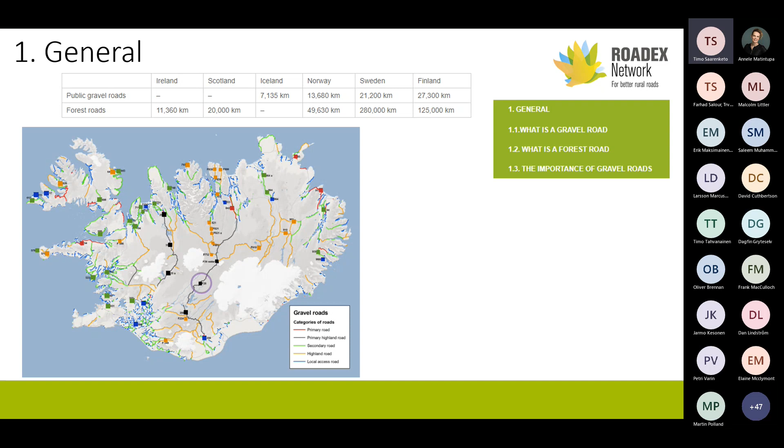One interesting feature in this chapter, even if you're not so interested in gravel roads, is an interactive system of photos of different types of gravel roads in Iceland. You'll see a map, and if you click on it - for example this F26 - you'll see a photo. In my opinion it's amazing; you can make an amazing tour all around Iceland and see gravel roads. It's fantastic - thanks to Hafdis, she did great work collecting this.

Chapter 2 tells about gravel and forest road components in general, about typical cross sections. There were some variations between countries, so this is my understanding of an average cross section between each country - not one individual type, but a typical compromise of different systems. For instance, gravel roads in general are 5.75 to 6.25 meters.

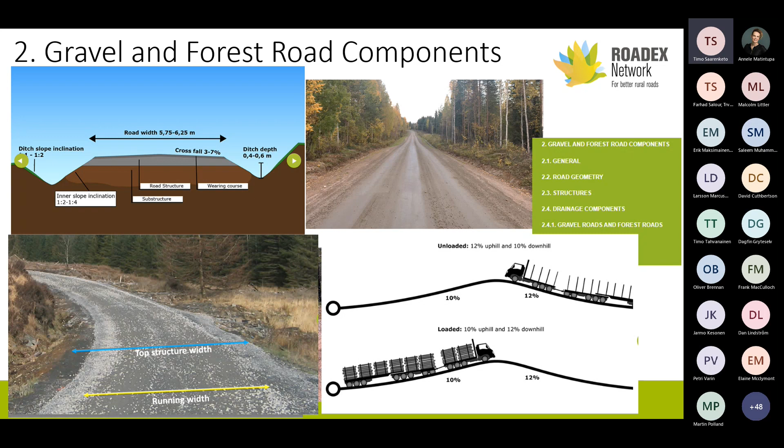So you are collecting timber and then driving back, so the vertical geometry can be different depending on direction. When you are hauling timber loaded, the vertical geometry is 10%, and unloaded it's 12%. I think it's quite a nice idea for saving money, especially in hill country areas. There are a lot of other issues too, but I took this as another example for this presentation, about bridges.

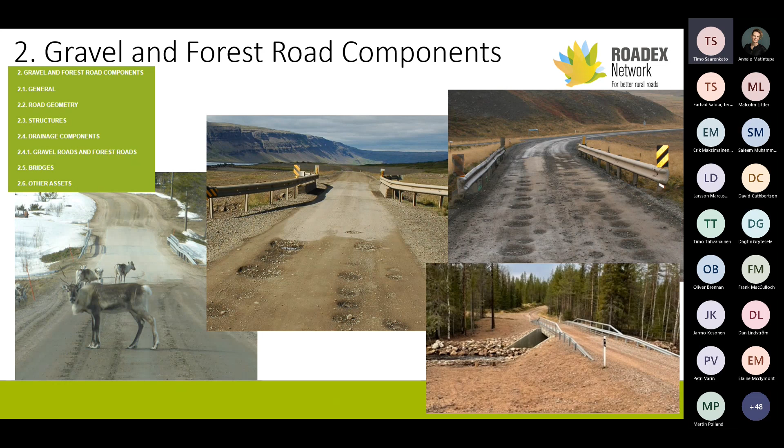One idea, not used in every country but very useful where it has been used, especially on gravel roads: if you have bridges, you put pavement on both sides of the bridge. There are one or two reasons for that. One is that with a paved road section you avoid potholes, because bridge joints and unevenness cause a lot of potholes. The other reason is that when you use dust binders like chlorides, they go with the sand onto the bridges, especially concrete bridges, and can cause extra corrosion on the bridge decks. So paving protects against that too. I'd say this could be considered one of the best practice issues on bridges.

A lot of the text is about the wearing course. That's one of my favorite issues, because I've been doing research on gravel road wearing course since 1981 - almost 50 years, actually more than 40 years ago.

One issue we're explaining here is a very nice history of how wearing course grading came about. I've heard this from an old engineer when I started my road career, and I don't know if it's an urban story - I haven't seen any report - but it was thought to be true that the history comes from Sweden. In the 20s and 30s in Sweden, there was research on gravel road wearing course material. First they checked the material on roads where they had a dusting problem and where they didn't.

In this case, the green area was where the red arrow showed where they didn't have dusting problems. Then they studied wearing courses where they didn't have deformation or wetting problems, plastic deformation problems, and that was the blue area. The area between these gradings was selected as the optimum grain size distribution of the wearing course. I don't absolutely know if it's the true story, but it's a nice story and easy to believe that it happened.

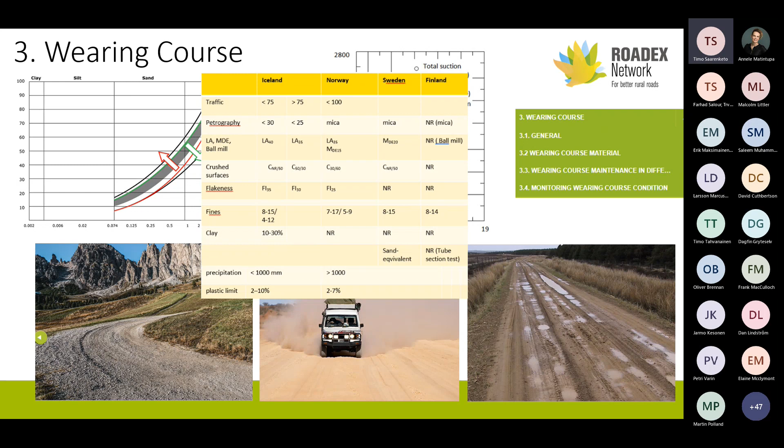Also some ideas about aggregate quality, some comparisons from Icelandic work. Iceland did a comparison of aggregate quality and how it should be studied for wearing course aggregate material. There are quite big changes, but very interesting comparisons too.

Another issue we found more than 20 years ago with road scanners, in the late 90s when road scanners started, we did research on gravel roads. One of the first things we found is that the wearing course thickness is not even, unlike asphalt roads—that assumption is totally wrong. The thickness changes a lot both in transverse and longitudinal directions, because of grading and other factors.

On top you can see a gravel road cross section from Siekkasjärvi, Sweden, northern Sweden, where on the wheel path you have about 60 centimeters of wearing course, but in between, on the field bed, you have hardly anything. This means that when you have mode 2 rutting, graders making it even are just increasing the problem.

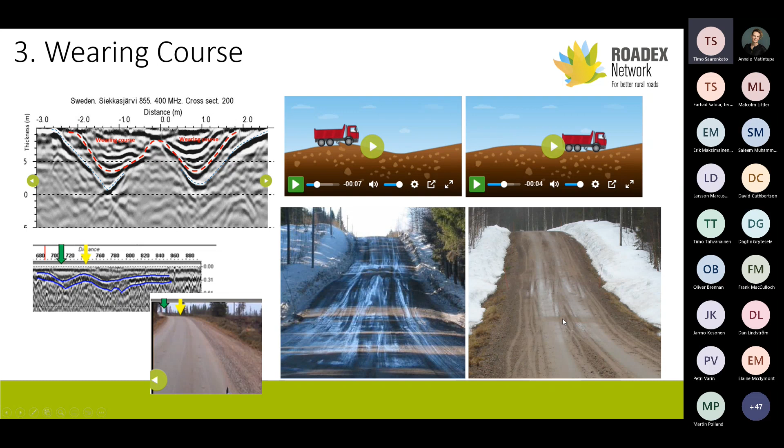Also, wearing course maintenance techniques are covered quite a lot over there. I don't have time to go through it, but there's a lot of text on what should be done for spring, summer, fall, and winter maintenance. One special issue addressed there is the importance of compaction.

We also note that especially if you don't have a proper compaction system, like in these photos from Iceland, you should use salt, because salt helps with compaction—this relates to theory I don't have time to explain. But using salt, especially during spring maintenance, forgives a little bit more if you're not using proper compaction.

Another special issue in winter maintenance, shown in the top right photos, is the removal of snow walls. This photo is from North America, showing that before spring comes, you should remove almost all the snow from the road, because melting snow water, due to capillary action, goes under the pavement road structure and causes spring thaw weakening.

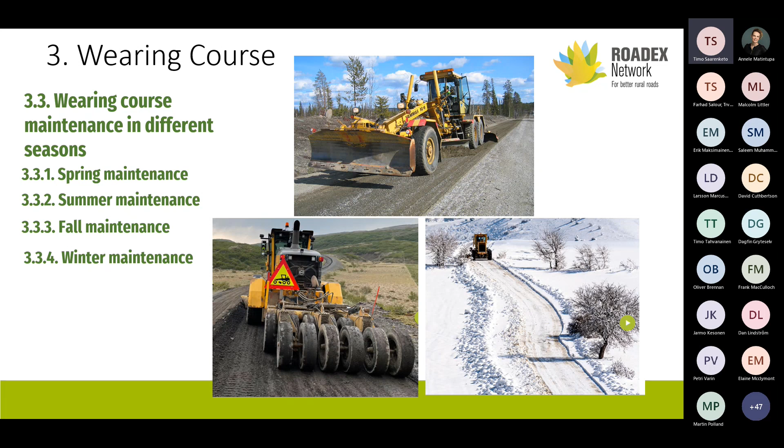This snow removal also changes the microclimate and evaporation. If you have high snow walls, the sun shines but there's like a cold spot there. But if there are no snow walls, evaporation is much higher, and the pavement or road surface dries much faster.

Chapter 4, bearing capacity. Here's a comparison of gravel road design principles, in this case comparing Swedish and Finnish design principles, which are slightly different. In Sweden, all gravel roads have the same basic design, and the only variation is climate zones—depending on whether you're in southern Sweden with climate zone 1, or northern Sweden with climate zone 4 or 5, the thicknesses are slightly bigger, thicker. It also depends on whether you have non-frost-susceptible sand or gravel, or a silty subgrade.

In Finland, on the other hand, we don't have this variation by geographic area. Instead it's based on the type of gravel road. A public gravel road with a lot of traffic and an important role in the road network is an 80 megapascal road. A slightly less important road is 70 megapascals, and gravel roads on private roads are called 60 megapascal roads, with slightly thinner structures. In Finland this is the standard system.

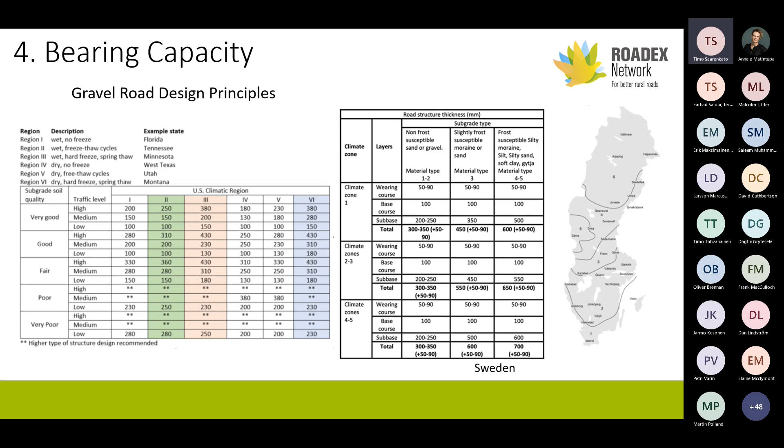As a comparison, we also looked at the US, where there are about 1 million kilometers of public gravel roads. The design principle there is different, though pretty similar to the Swedish approach, but they also factor in traffic level—high, medium, or low traffic—so it's a bit of a combination. But comparing total thicknesses by geographic area, the USA and Nordic countries end up at pretty much the same level.

Forest road comparison is from Finland and Scotland. We published this, and we went through all the others too, but I think these were interesting because in Scotland a defining factor is CBR, which you can measure in the laboratory or with the DCP in the field. With that you can define the subgrade soil, and that then defines what the structural thickness should be.

One special thing I already mentioned is the formation width of the surface. If you are on rock or sandy gravel, the top width of the structure is 5.4 meters, but once you go to silty clay or peat, it has to be 7 meters. This is a nice approach because it helps fight against mode 2 rutting on these roads.

Finally, since this is a ROADEX recommendation based on a lot of research on forest roads and their performance, we show our recommendation on target bearing capacity and classification. If you're at 85 to 110 megapascals surface bearing capacity, for instance falling weight measured, it's acceptable, though you can have minor problems during very bad spring thaw weakening. Above 110, it's fully acceptable. In Finland, shown on the right, there's a similar classification to public roads, but at 80 and 60 megapascals, and the lowest forest road category is as low as 50 meganewtons or megapascals.

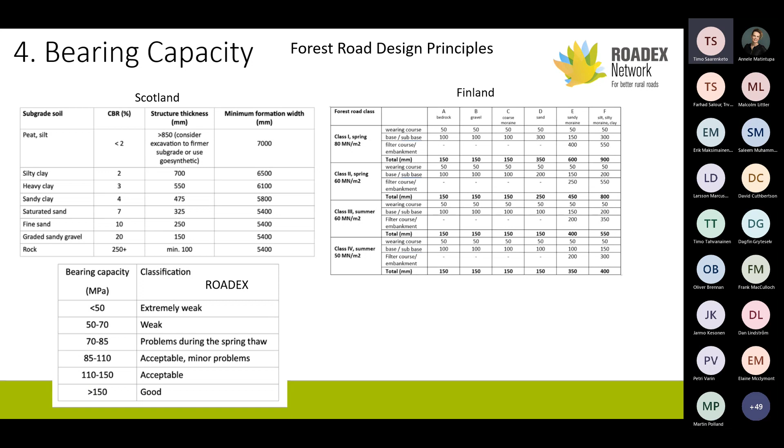Chapter 5 is roads on weak subgrade, which covers much the same information as roads on peat, but with some new information, including consolidation or settlement when building a forest road or gravel road, and how it takes place.

A very good rule of thumb: if you're building a gravel or forest road, one week after primary consolidation you are halfway through the total settlement. So once you measure and see where the bottom of the structure is, within the next 30 years—because secondary consolidation is so slow—you get the other 50%.

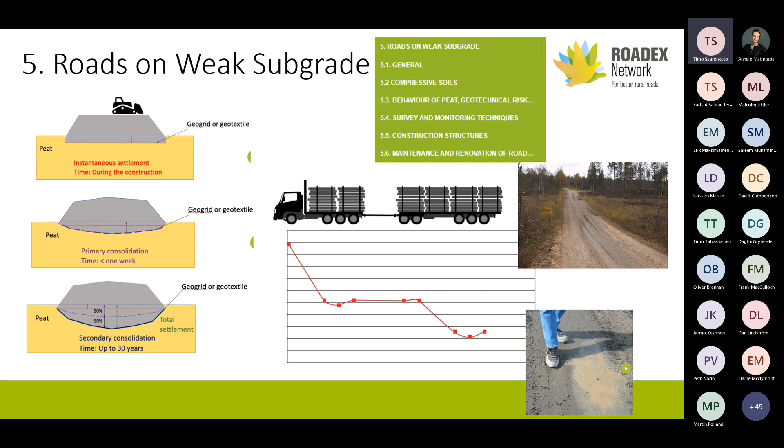We also explain quite a bit about pumping and why failures happen, especially on peat, at the end of a peat box. The reason is that with big timber trucks, people often say the road recovers behind the tires, but with peat this isn't true at all. With these trucks, the last triple bogie axle is always the heaviest, so as the truck moves, the road structure starts pushing water in front of it. When it reaches the end of the peat box, or an obstacle, the water pushes up, creating the pumping effect.

On roads with weak subgrade, there's also a falling weight rule of thumb for detecting peat beneath a road. Using a 1200 millimeter geophone, if its deflection is 200 micrometers, you can be about 90% sure the road rests on peat. If you have that 200 micron reading and maximum deflection is more than 2500, you can have a problem. But if maximum deflection is more than 3500, you can be sure you'll have issues with heavy trucks.

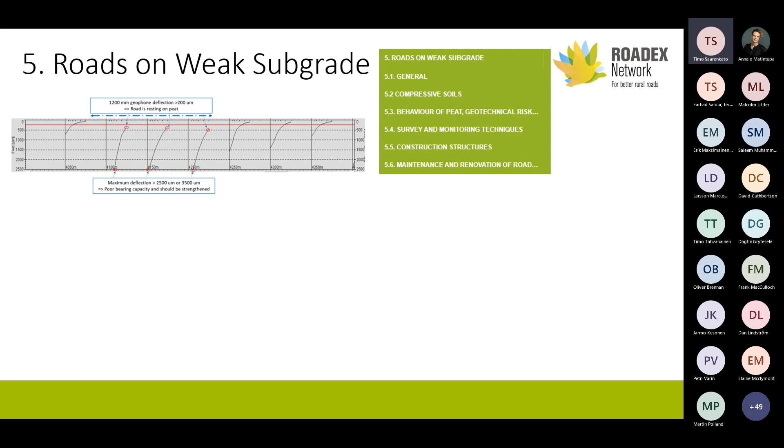There's also an example of how to handle this. Especially on forest roads, if you have peat, you build a slightly overloaded embankment immediately. Where settlement starts to occur, you use a grader to even it out. Another benefit in Nordic countries is that once your grade line is slightly higher, snow accumulation is lower because the wind takes care of the snow.

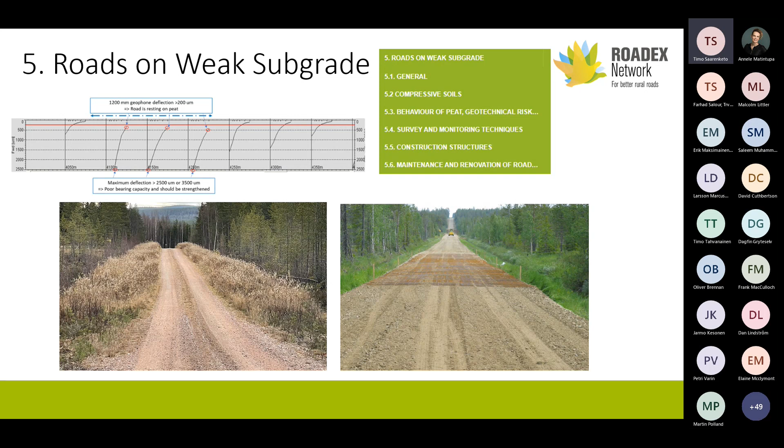The other thing we have been doing in ROADEX research and some other projects, with very good experience, is using steel grid structures at the beginning where you enter the peat area, and on the other side of that. This is an excellent tool to prevent these pumping problems.

Drainage is covered in a different e-learning, where there is quite a lot also on gravel roads. But repeating here, we show what type of drainage problems exist, what the drainage components are, and how you should do drainage maintenance.

One issue we have been finding out, especially in Finland over the last years, is that if you have potholes, most likely in 80% of the cases you have a problem with the drainage. At least in spring, even though in summer you don't see too much water, if you come to these pothole areas in spring they very often look like that, and then you have pothole problems over the summer.

The other is erosion, especially in hilly or mountainous areas. If you have verges on the roads and water doesn't flow under the heavy road, you might have a big problem. The third one is clogged ditches, which especially affects shoulder deformation. Your ditches definitely need to work well, otherwise you will see problems like this.

Especially here in the north, there is differential frost heave. In this case, for instance, is a nice example: you see a small boulder here, a bit bigger than football size, sitting at the bottom of the ditch, and it starts to block the water flow. The following winter, you had a huge frost bump on this section. So even one individual boulder can cause a frost bump on the roads.

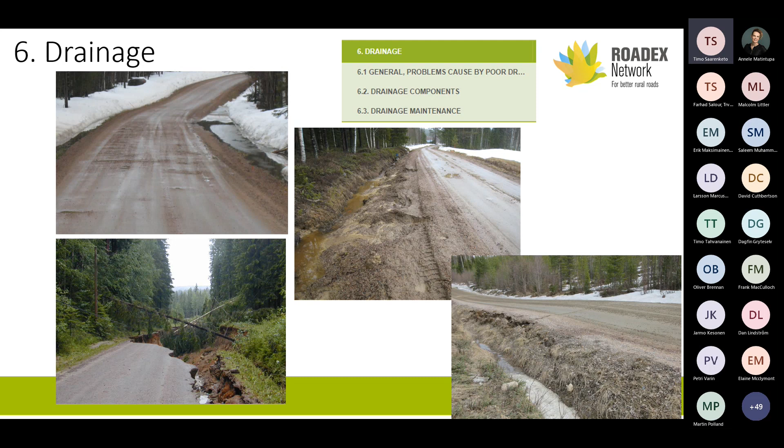Drainage also relates to technologies like widening of the roads. This is the ditch bottom, showing how you can measure the cross section of the road with the laser scanner, and also from the GPR you see the bottom of the pavement structure or road structure, and then you see the ditches, red and blue. Red means the left ditch, which is here, and ditches should always be deeper than the bottom of the road structure. Once they are too high up, you start to see deformation problems immediately.

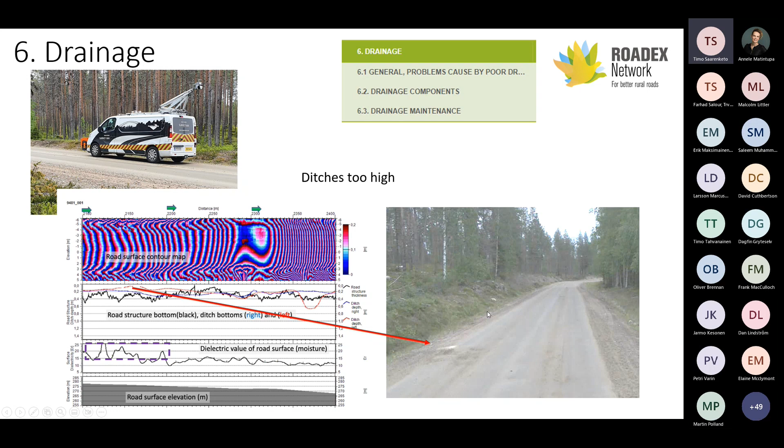Also with GPR, you are measuring the dielectric value, which tells you about moisture content in the wearing course, because you are measuring very high values. So this is definitely a risk area for spring thaw weakening.

Another drainage issue we are now starting to pay more focus on in Finland is that if you have drainage problems and the pavement structure is wet, first of all your cross section starts to flatten because of mode 2 rutting. It's pushing material aside, so what you can see is widening of the road based on laser scanner data, and flattening, especially at the road center going down while the road gets wider.

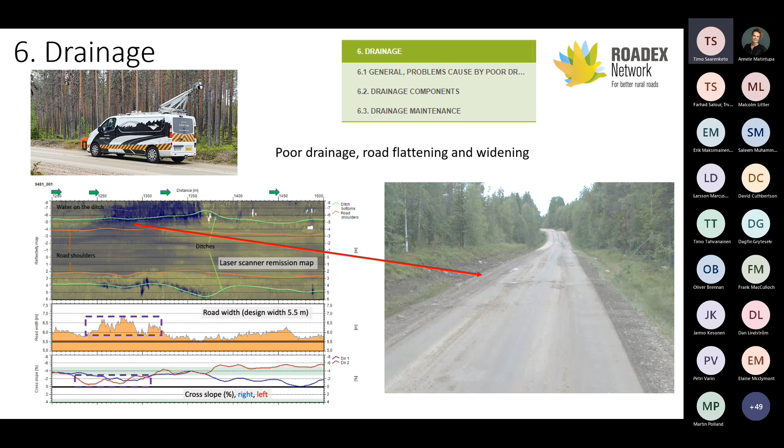These two parameters, in this case, the design width of this road is about 5.5 meters, and in this section we are at almost 7 meters wide, where you see the spring thaw weakening problem. So a very nice indication is that when the road gets wider and flatter, you most likely also have a drainage issue.

Chapter 7 is about falling weight deflectometer techniques, and this surface structure. Basically, we are recommending in ROADEX that you should not only look at the maximum bearing capacity itself, but also look at where the problem is - is it on the surface area, like mode 1 rutting, or is it a problem at the subgrade interface, which we call mode 2 rutting?

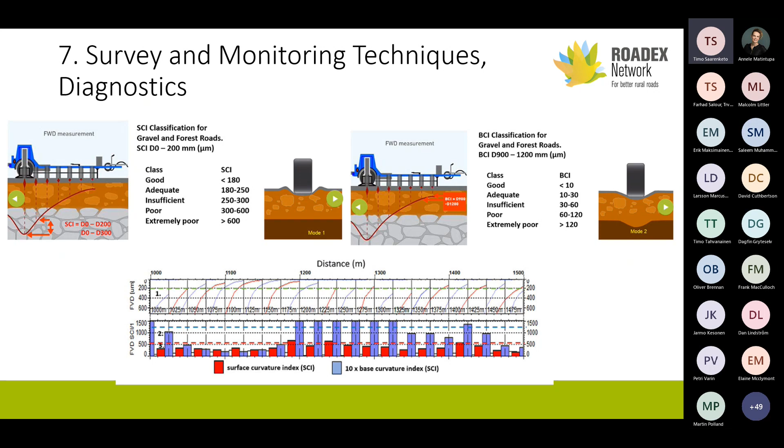That you can calculate, and that information you can get from the SCI class or BCI class, the surface curvature index or base curvature index. There is an explanation of how you do it, and also some critical limits, where you have a poor and what is the extremely poor limit. That helps you a lot when you need to do strengthening and design.

Finally, some information about roughness measurements, where we've been testing 3D accelerometers on the roads, with an accelerometer under the driver's seat, cameras, a GPS antenna, and a 4G/5G antenna that sends real-time data.

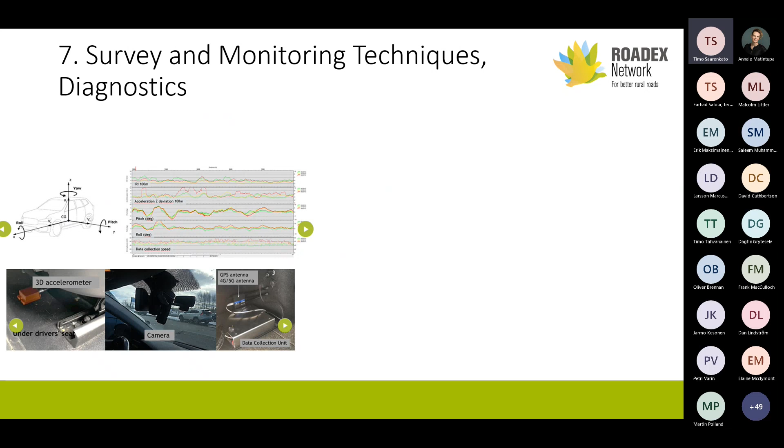For instance, our system that we've been testing has data available in 2 seconds. When you are driving the car in your gravel road area, it is on the cloud in 2 seconds. This is not ROADEX research, but it's published.

This is from the Central Finland test area, very interesting information showing how roughness changes on gravel roads. These are two repeated years, starting from 2021 and ending in 2022. The worst roughness is always in April, when the frost starts to thaw, and then it goes down slightly up to

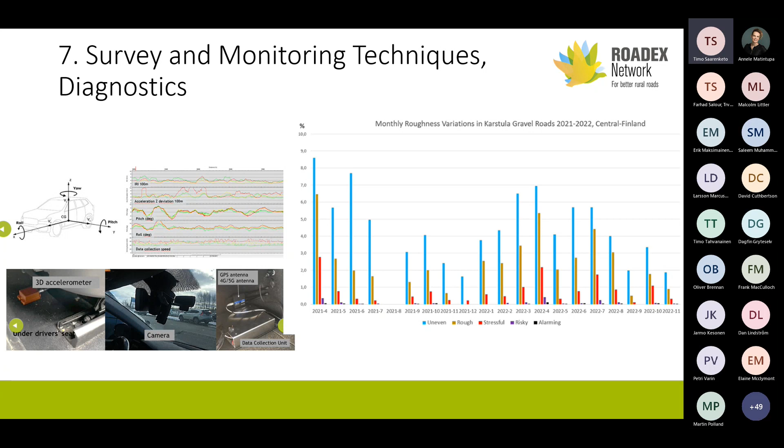November. There could be some increase in midsummer if you have washboarding, giving higher values. But quite surprisingly, the gravel roads are smoothest in December, when they are

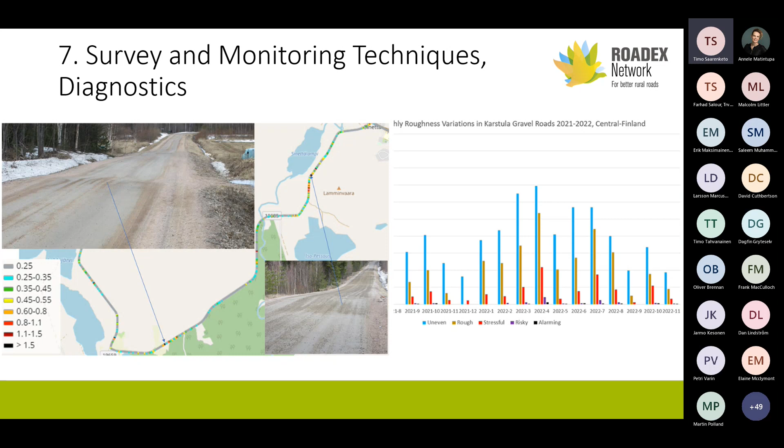frozen about 20 centimeters. There's also an example of where you get roughness and what's the reason for these different roughness areas, and also how you can detect frost bumps, because frost bumps can be very dangerous for traffic safety, but they only occur in April, May, late March, and normally you measure roads only in summertime. So how do you detect them, how do you measure them? We'll show some examples of how we measure and identify frost bumps on these roads.

Then chapter 8 is maintenance machines and techniques.

I'm starting to run out of time, so I'll speed up a little, talking about grading and blading. One issue I've been finding since I was in road administration, where I was part of the team teaching maintenance crews on gravel road maintenance, is that at that time we talked very much about blade angles. At the moment I've been seeing some graders and bladers that always seem to use a fixed angle, and this angle idea should be brought back.

Especially when you have cutting compared with blading or dragging, or if you're doing light maintenance, this angle should be totally different. Also, if you have corrugation or washboarding, the cutting depth should always be deeper than the bottom of the pothole.

This seems to be a quite big problem in many areas now in Finland, and I'd say other countries too: we don't have heavy graders, many systems are tractor-driven graders, and they're not powerful or heavy enough to reach the bottom of the pothole. Once your pothole bottom is maybe 6 to 8 centimeters and your cutting depth is only 2 or 3 centimeters, these potholes, like even here, come back in 2 or 3 days.

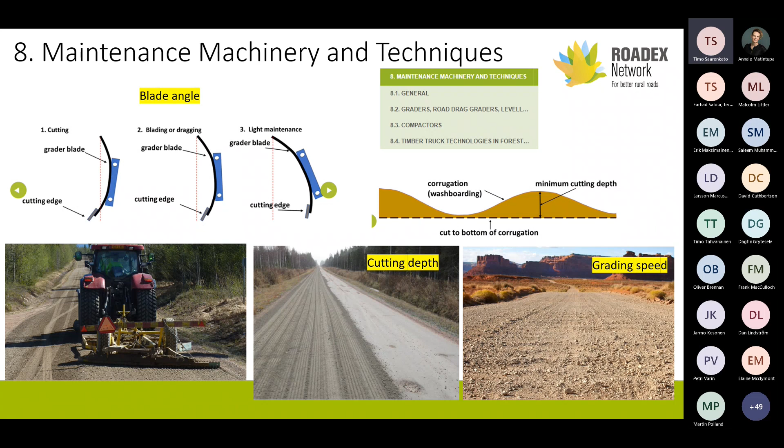Here's a nice example, not from Nordic countries but somewhere south, about grading speed: on the left side the grader has been driving at slow speed with very nice grading, and on the right hand side, driving too fast, you're already making corrugation. Once you have this, you'll have a problem very soon. This seems to be very much forgotten in many countries today.

Chapter 9 is renovation—a lot of information on that. I'll just skip through, but I want to remind you of a very nice rule of thumb.

This is from Mike Pinard, who is a low volume road guru in Africa and has worked very much on very challenging conditions for low volume roads there. He has this rule of thumb that there are five main risks on the rural road: material quality, drainage, bad quality construction, layers too thin or insufficient compaction, maintenance—wearing course, drainage or winter maintenance—and traffic, meaning overloading. The rule of thumb is that if you have only one problem, you can handle it with maintenance, but if you have two problems, then you have to do renovation.

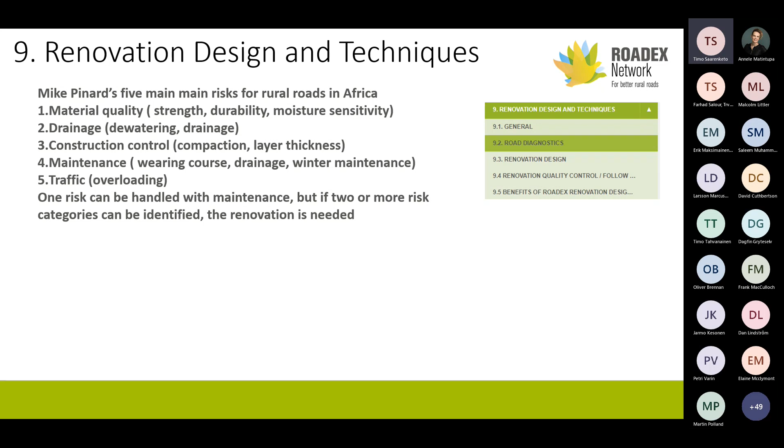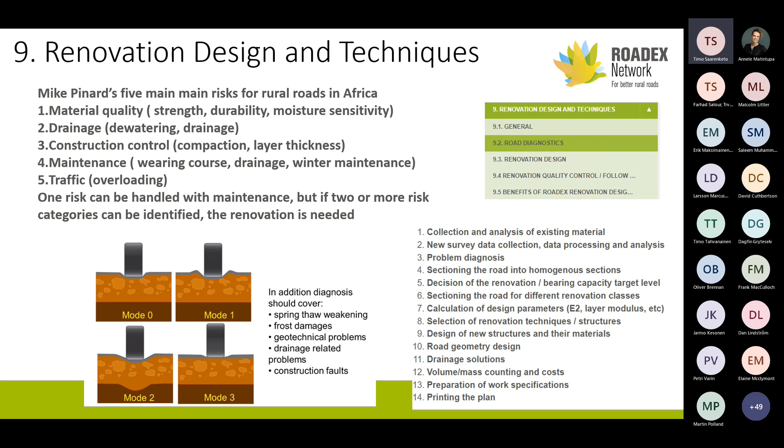I really like this rule of thumb for deciding when you should start heavy work rather than just maintenance. As I said earlier, we use the classical ROADEX deformation modes and classification for diagnostics and recommendation, and also the process—this 14-step process for doing a renovation plan for the roads. We won't go through that in detail.

But on renovation design techniques, many countries still use nomograms, where you have a current bearing capacity and a target bearing capacity, and then define how much new aggregate is needed.

But if you want to be more analytical and more precise, and also if you want to save money, we are showing that you should do the falling weight surveys and GPR surveys to get the continuous bearing capacity, and then you can really see the real structures.

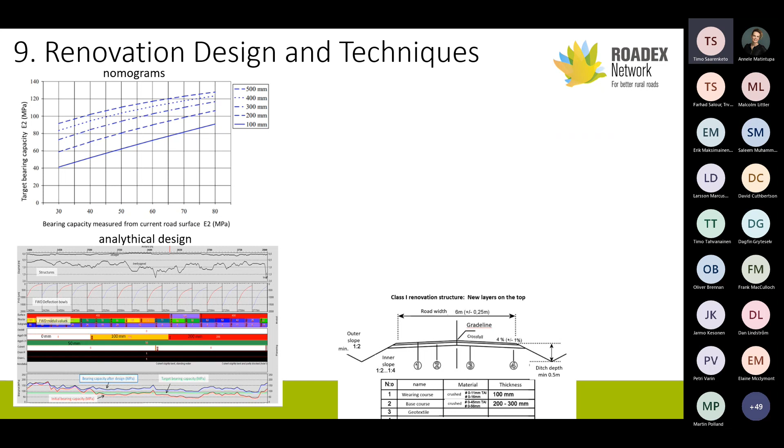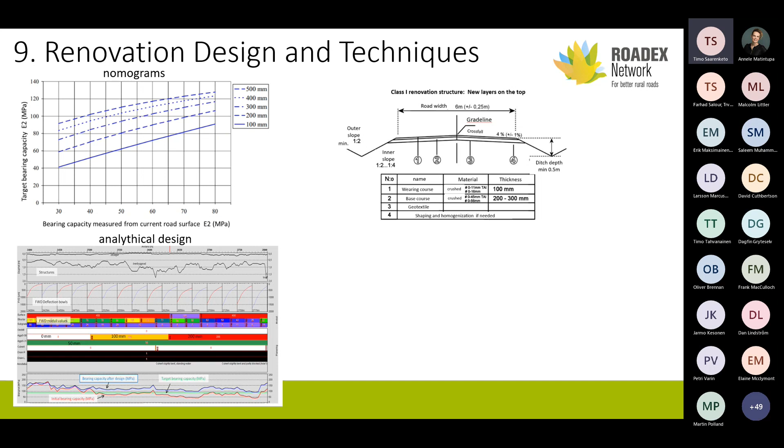We are providing also typical examples of different types of road renovation structures, depending on what type of problems you have. And we're also addressing one important issue which is very often forgotten, for instance if you are using nomograms.

The big mistake in many countries is that once you are doing renovation, you are leaving the old wearing course and then starting to build everything on top. That means you have a very plastic, water sensitive, water susceptible material left under the roads, and that might destroy the good structures.

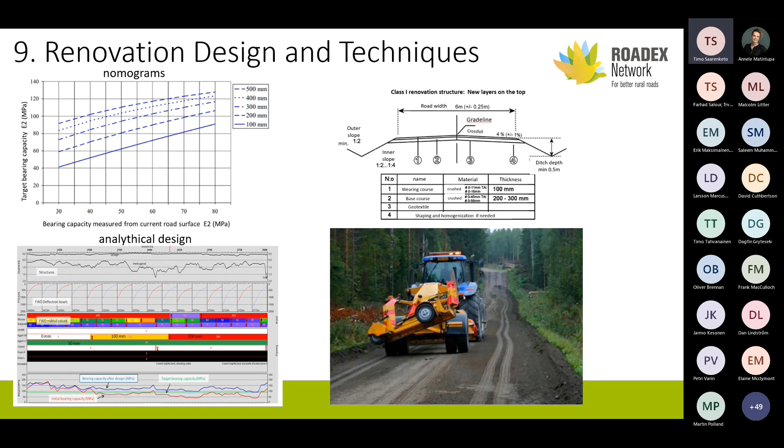So basically what needs to always be remembered, like in this case, is that you have to have a grader and grade the old wearing course away to the side of the road, then start to build a new structure. Then you can use this wearing course later as a new wearing course, but don't leave it under there.

Seasonal changes, and chapter 10, some basic rules for why we have surface thaw weakening, structural thaw weakening, subgrade thaw weakening. In Finland we have only two classes: surface thaw weakening, pintakelirikko, and subgrade thaw weakening, runkokelirikko. But in general there are three classes, three types of deformation, and also talking about road-friendly tyres.

How do you monitor seasonal changes, like Percostation, which have been doing a lot of research on that in the earlier ROADEX project, and also the process - how do you know if you have a spring thaw weakening?

The critical issue is how the road is freezing. If it's freezing when it's wet, and the freezing temperatures are not very cold, then most likely you will have a thawing weakening. But if it's freezing when it's dry, then the risks are much lower.

But on the other hand, in winter when it starts to thaw, the other issue is that if you have rain in the first part when the surface thaw starts, you should have always very dry, windy weather. Then you are safe, but it's very sensitive to rain at that time.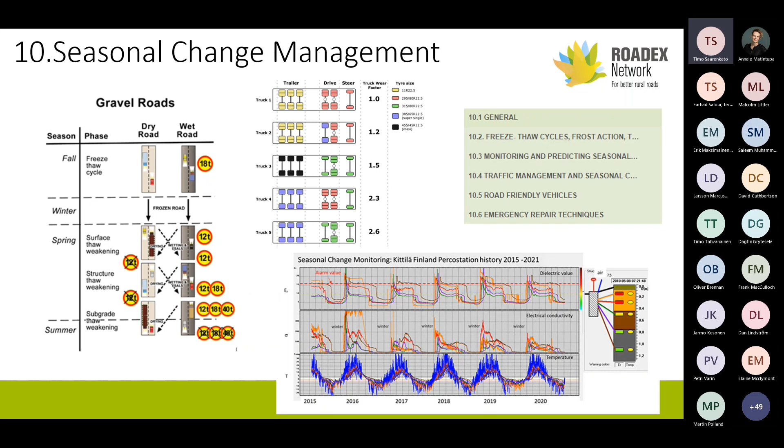Chapter 11 is finally about environmental considerations, thinking about especially environmental issues, for instance surrounding habitats, and dusting is one issue. Gravel roads are very often built very close to the houses that people are building, so vibrations, dusting, and noise are a critical issue.

So you have to keep - there should always be, when the houses are close, the road should be in very good condition.

The other important issue is culverts, especially on forest roads, because fishing matters - culverts should be properly installed, because migration of fishes like trouts or other valuable fishes is impossible if the culverts are not properly installed.

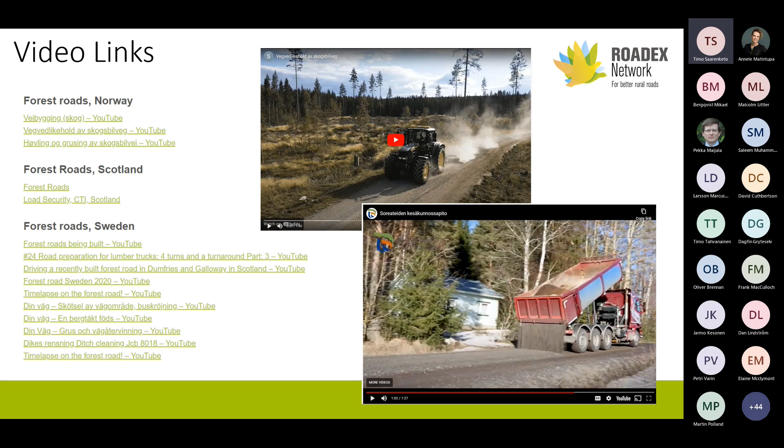Video links - I would say maybe 60, more than 60 video links from ROADEX countries and also from North America, USA and Canada, about forest roads and gravel roads, and how you do different types of tests on that.

And literature review and references - this is very much for students or researchers, to find some links where we have been finding our recommendations.

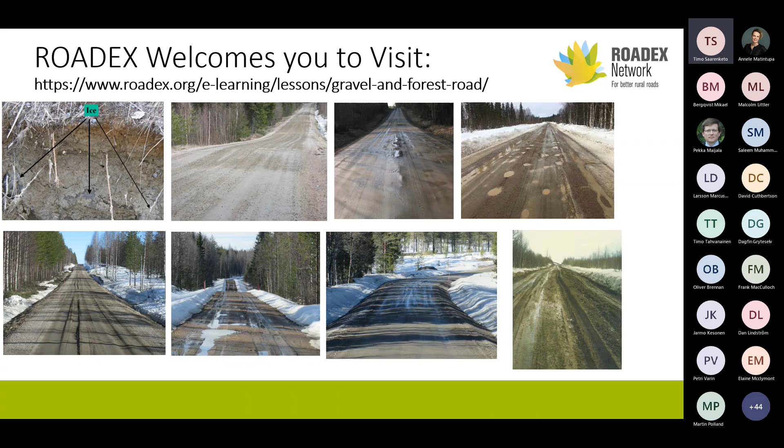So this is pretty much 1 hour spent over there, and this is the final. There is a lot of examples of different types of problems on the roads, but if you are not so much interested in the road problems, there are a lot of very nice, at least to my eye, very beautiful images and photos of gravel roads and forest roads all over the world that you can also enjoy.

So that was pretty much about gravel roads, and you are really welcome to visit it's roadex.org e-learning lessons and gravel and forest road section, where you can find this.